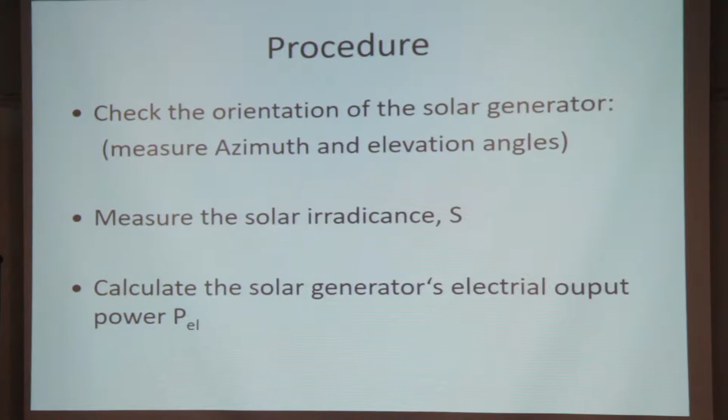So how do you go now step by step? First, you check the orientation of the solar generator. You look, is it facing north? Or in some cases, west and east, as we heard from Reinhold yesterday.

And you check the angle. Is the angle okay? Is it installed according to what we did in this second place where we went on Tuesday? And then you can calculate the solar generator output.

So you remember, you need what we call a calibrated cell, which gives you the exact solar radiation. You saw on the back it tells you which radiation corresponds to which voltage you measure. And naturally, you have to place this measuring cell at exactly the same angle as the solar panels.

And then we calculate the electrical output, which actually looks quite complicated, but in reality it's very simple.

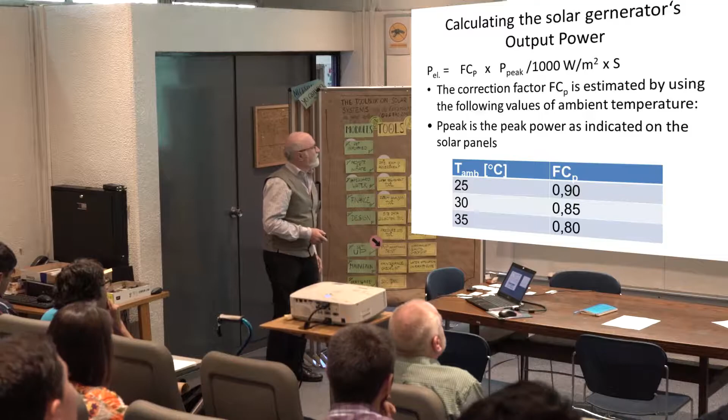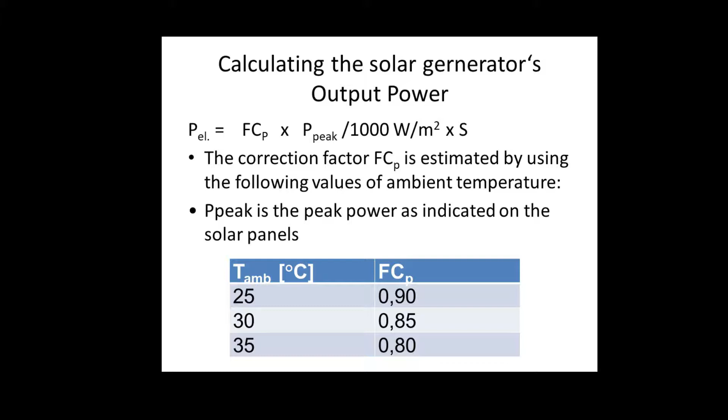And then, as we saw, you measure the irradiance. This is to get the dimensions right. You have the peak power of your solar cells, which you see from the back, and you divide it by 1000 watts per square meter, then times the irradiance.

I think that's clear. If there's any questions, you just ask me.

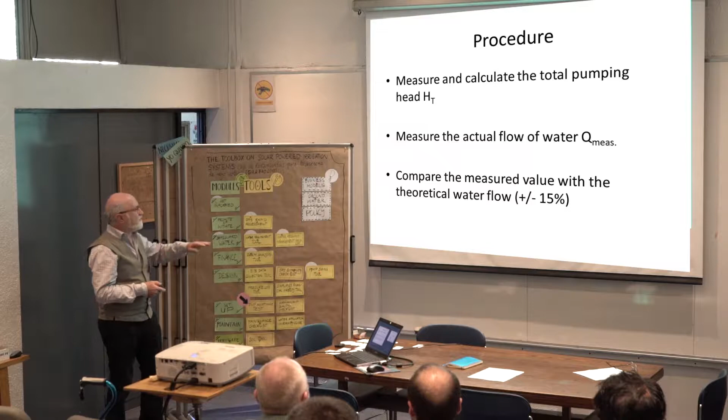And then we'll calculate the total pumping head. Better even if we can measure it. I'll show you in the next slide how you will be able to at least partly measure it. You measure the actual flow, and then you try to compare it with the theoretical value of the water flow.

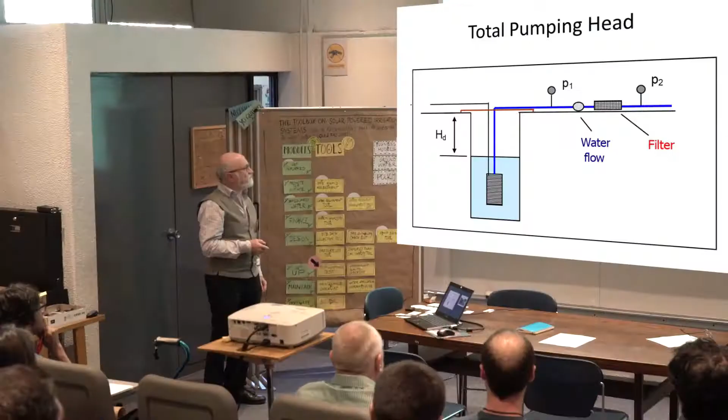So how do you do it? For the total pumping head, what you can do, as we heard from Reinhold yesterday, is if you have a system, it's very good to measure the pressure just as it's coming out of the well. So then, if you have the pressure here, you just have to add the dynamic water level, which you could measure with this dipper.

You saw we once showed you a photo of this line with a sensor on the end, so you put it down and the light clicks as soon as you hit water. So this is one way to try and get a precise total head.

I mean, you can also try to calculate it if you don't have this pressure gauge here. But the problem is usually the filter - you don't know exactly what kind of losses it has.

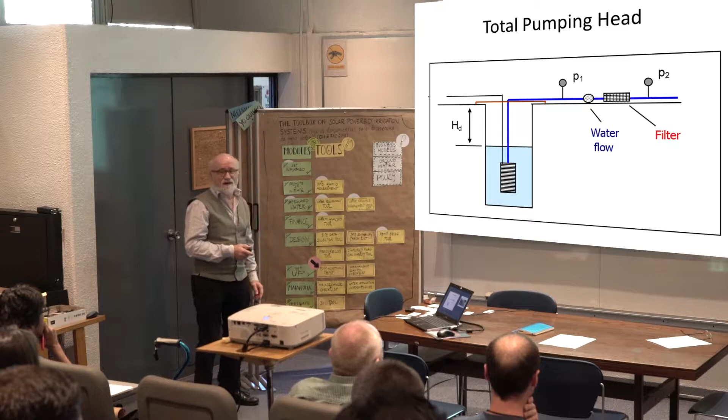So now to measure the water flow. There are different ideas for what you can do. For example, you look how long it takes to fill a 10-liter bucket. You can also, if you have a tank with the circumference and you measure the height, get the volume, and divide it by the time.

But sometimes it's not so easy to measure the water flow. Every plant is different, so hopefully you find some point where you can measure the water flow.

But then what you do is compare it with the theoretical value, and for that you actually need the pump curve.

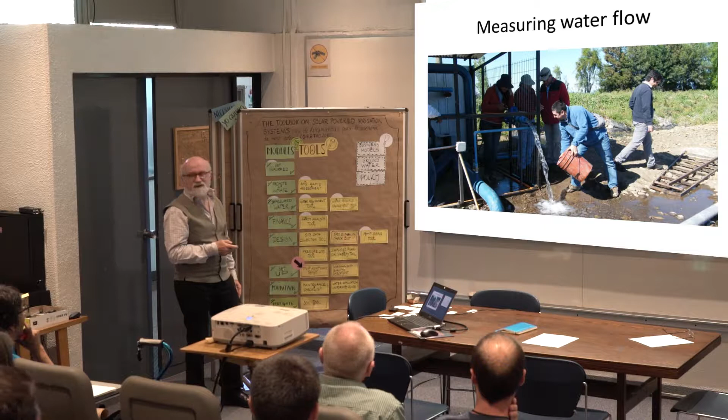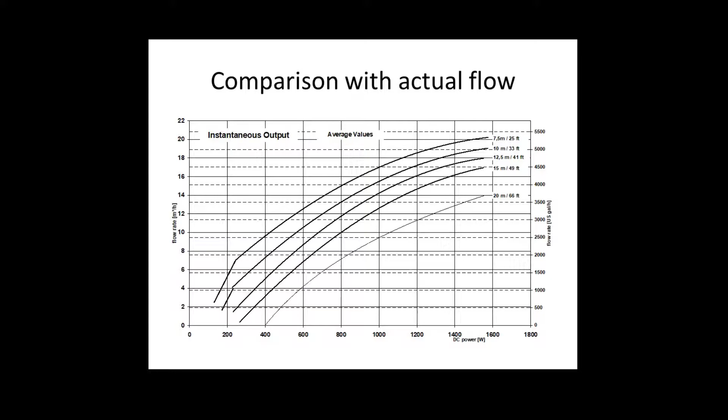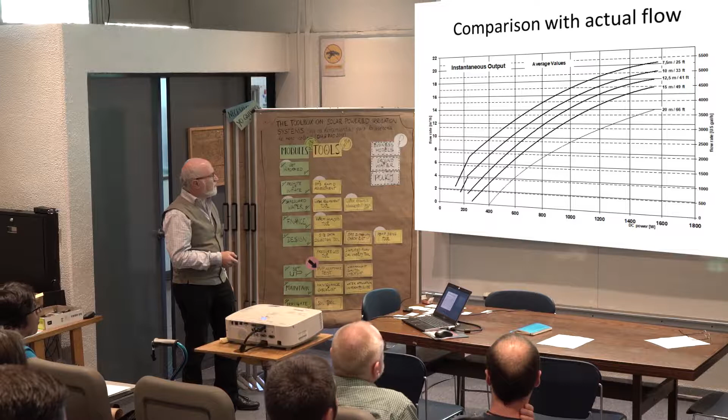So we measured the height. Let's say in our case we have 15 meters, so we are on this curve. And we also measured the power, so we have 800 watt as an example. Then we see that we should have a flow of 10 cubic meters per hour.

Depending on how precise you can measure, you might have 10-15% plus or minus. But if you are far out, then you are sure that either your pump is not doing what it should, or the installer installed a cheaper pump.

Then you try to get down to it, and you check first your measurements, because sometimes you are too fast and you realize maybe you miscalculated. If you are very sure that your measurements are right, then you start going step by step to see where the problem could be. Maybe the filter is clogged, so the pump needs much higher pressure than expected.

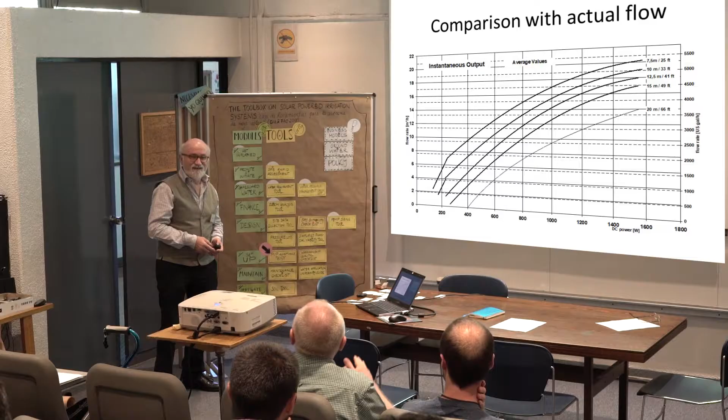Reinhold, you have experience from Chile, what could be the range of the error range? What could be the problems you would expect with these measurements?

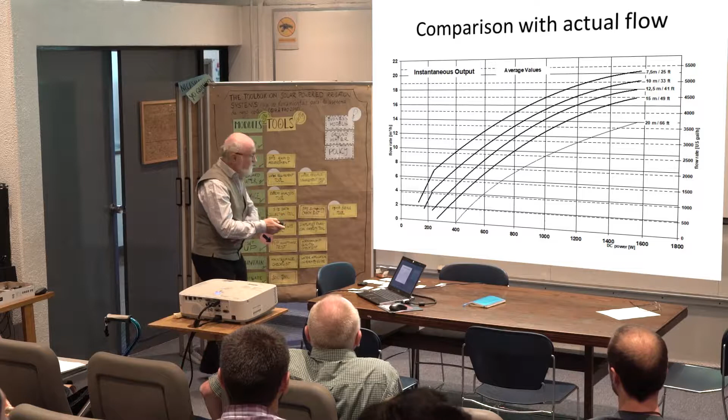Okay, yeah, this was the acceptance test.

The other tool we look at is the workmanship quality checklist. What do you think—where would you check the quality, if the quality is according to standard conditions? What kind of quality do you think we should look at if you look at a solar irrigation system? What would you say?

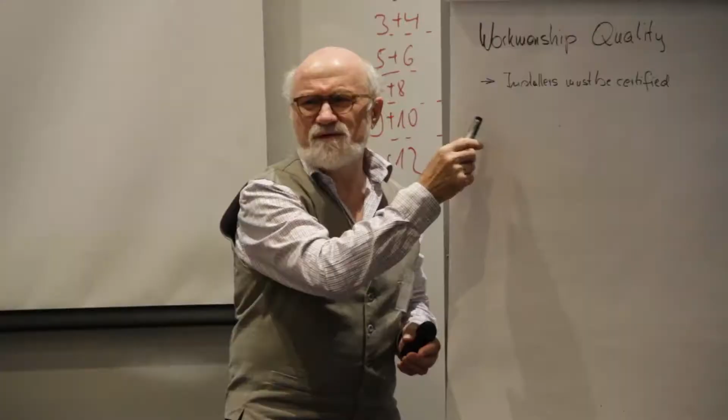In many countries, photovoltaic systems can only be installed by certified installers, and they have to be certified by SEC, which is the standardization institution, I guess, in Chile. I don't know if we have it in every country, but I think that's a quite important point.

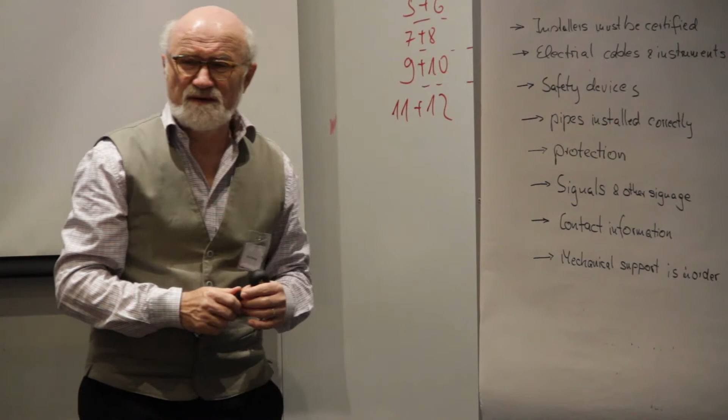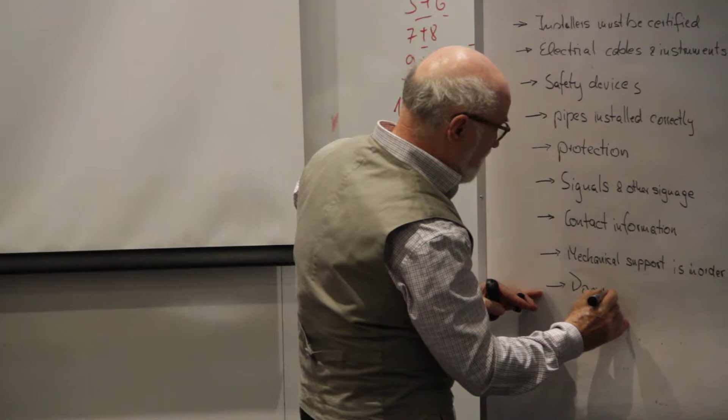El mantenimiento más crítico para los técnicos es la documentación. Tiene que haber manuales, como vimos con el eléctrico en el campo solar comunitario. Tienen que haber manuales, pero el instalador se va y se lleva el manual.

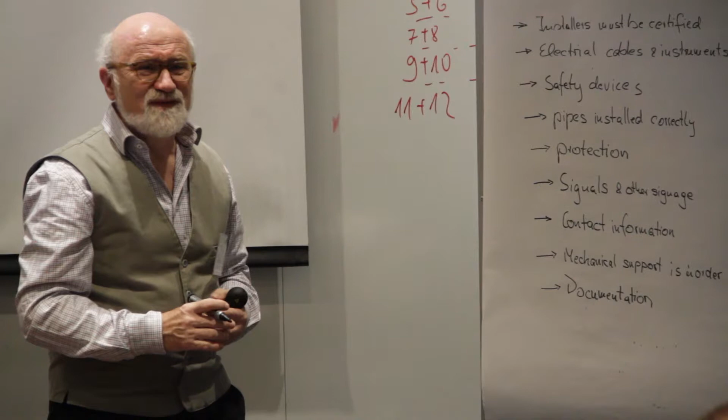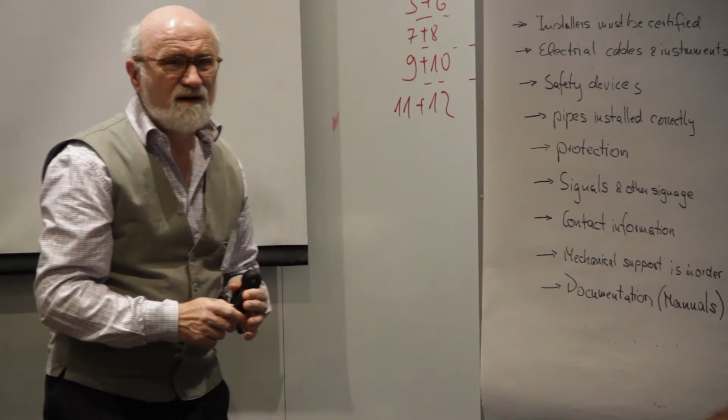Uno va a terreno sin ningún instrumento y aparece un código C1. En un solar tech eso es circuito quemado. Entonces perdí una mañana tratando de ver, probando todo, y al final lo que estaba quemado era el inversor, la placa. Y lo estaba mostrando, pero si uno no sabe que ese C1 es circuito quemado, no sirve de nada.

Manual de usuario, tiene que haber un manual de los componentes, sobre todo los electrónicos, con el agricultor, a mano o en la caseta. Normalmente esos manuales nadie los entiende, ni siquiera los técnicos a veces. Por lo tanto debería ser un manual que el usuario entienda.

Mejor todavía si está traducido, porque los manuales están en inglés. Mi pregunta sería: ¿eso existe? ¿Un manual así? De todos los equipos hay, pero el agricultor nunca lo conserva, a pesar de que en INDAP los capacitamos.

Se les deja un manual de uso, pero no un manual de los equipos. Dice enciéndalo aquí, revise la presión acá, pero no dice qué significa el código C1, C2, C4, C50. Muchos equipos, como los que vimos, tienen luces, y qué significa cada luz está en el manual.

¿Y eso se lo dejaría al usuario? Hay que dejarlo en la instalación, ojalá, como pasa con los eléctricos, los tableros, que tiene que estar el circuito completo disponible, para que si viene el técnico lo pida y no venga con las manos vacías.

Lo mismo sugiero: se debe tener, como todos los equipos, una bitácora de uso. Ese cuadernito que se pone al lado del equipo donde se escribe cualquier falla, cuando se usó, historial de mantenimiento, para que cualquiera que llegue vea un historial de uso.